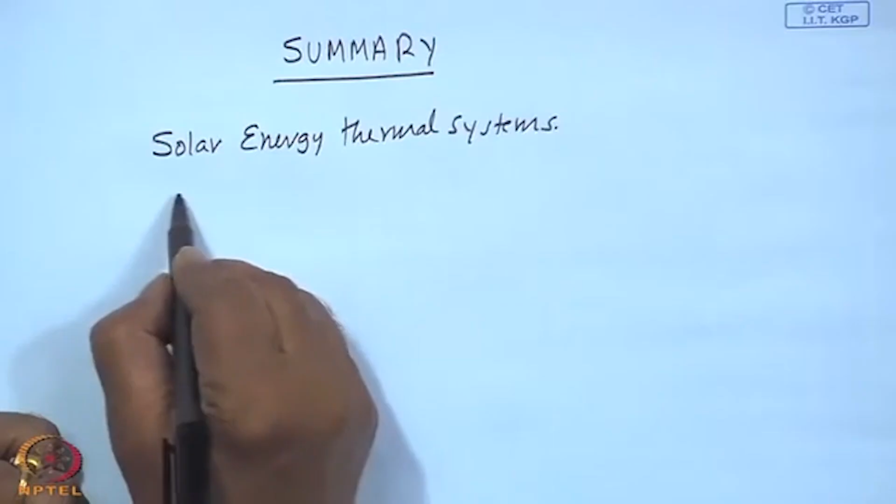So, we have covered quite a number of topics. I thought I shall take this opportunity to give my last or concluding talk, which will summarize what we have done in these about 40 lectures. Firstly, the limitation is we have considered only solar energy thermal systems, and in that we tried to give emphasis more to the principles rather than a particular system.

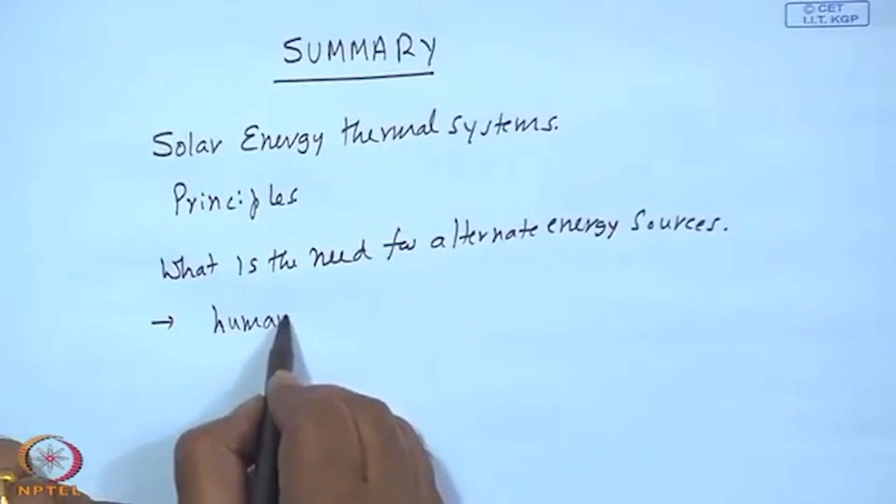And the basis for that is we try to establish what is the need in general for alternate energy sources, from which we have said that human dependence on external sources, these external sources being limited and being depleted at a faster and faster rate, people started having a look at alternate sources of energy, out of which solar appears to be a promising option. This is sort of our introduction.

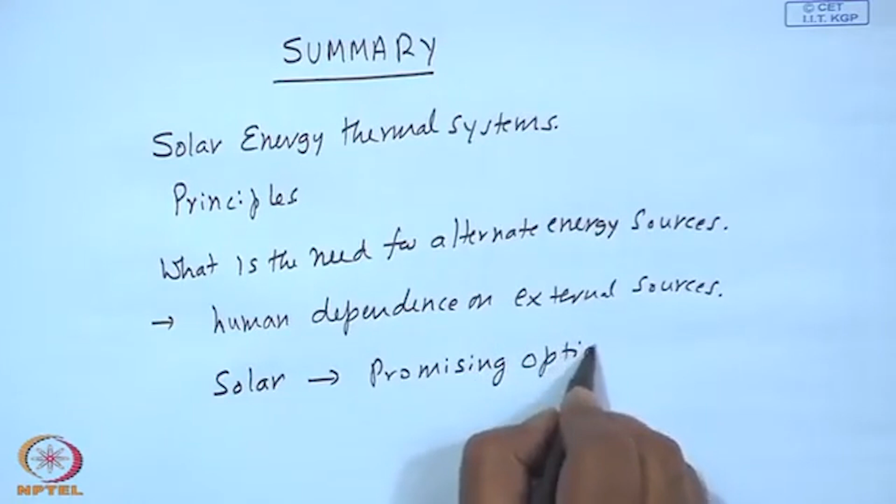So, we have gone through a lot of mathematics, and then we defined GON, that is the solar radiation on a surface normal to the sun's rays under extraterrestrial conditions on a given day, which is in terms of the solar constant GSC, which is if the surface is normal to the sun's rays under extraterrestrial conditions at mean sun-earth distance. So, that is how the solar constant is defined, and these estimates are of course varying.

It could be 1353 watts per meter square, even 1367 watts per meter square. As we are getting more and more, or rather better satellite data, this is being revised. And then we said that Earth's declination delta is given by the equation 23.45 sine of 360 times (284 plus n) upon 365.

Of course, I am not going to rewrite all these equations, so more exposure will be given to each frame. Everything is in standard time as far as we are concerned, and calculations shall be done in terms of solar time, which is given in terms of the standard time plus 4 minutes per degree of the longitude of the location and the longitude based on which the time of the country is based: LST minus LOC, plus or minus E. E is the equation of time, which is again related to the day of the year by the equations E and B. So, that plus will be for the western and minus for the east longitudes.

Generally, we try to define a number of angles wherein you have got a surface inclined at an angle of beta. Then this is the north-south axis or north-south direction, and this is the west-east, and it is not in general in line with north-south. So, there may be an azimuthal angle of gamma, it looks like r, but gamma is the location or notation we have been using. Zenith is nothing but the vertical to the horizontal, which makes an angle theta z with respect to the sun's ray, and with respect to the outer normal to the surface, the sun's ray will make an angle of incidence of theta.

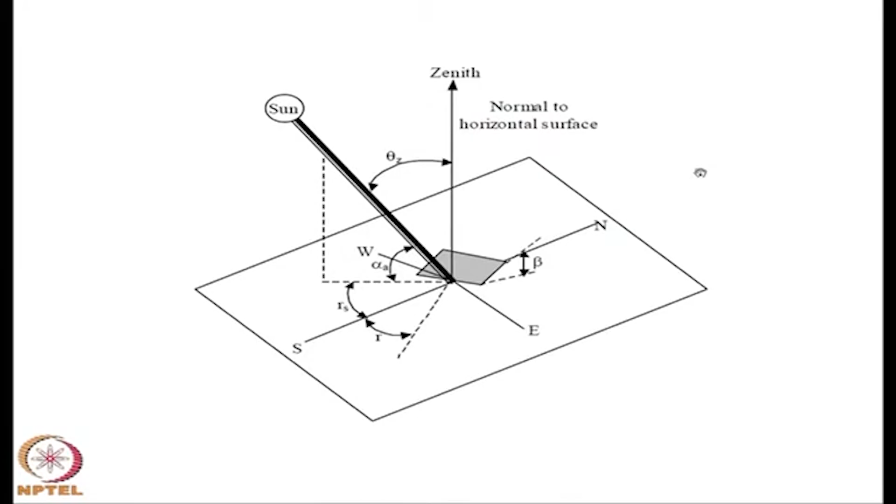So, that theta is in general a function of the latitude, slope, and of course the time omega and the azimuthal angle gamma, which is a long relation that can be put in a shorter form as cosine theta equal to A plus B cos omega plus C sin omega, where A is one expression, B is another expression, and C is cos delta sin beta sin gamma.

And if the surface is horizontal, the angle of incidence is also called the zenith angle. It will be a simpler expression, which you can obtain by putting beta equal to 0, as simply cos phi cos delta cos omega plus sin phi sin delta. Now, you will find this cos theta z to be independent of gamma, because if you have a horizontal surface, the projection of the outer normal will be a point, and you cannot define an azimuthal angle. And very rightly, the equation reduces to be independent of the azimuthal angle.

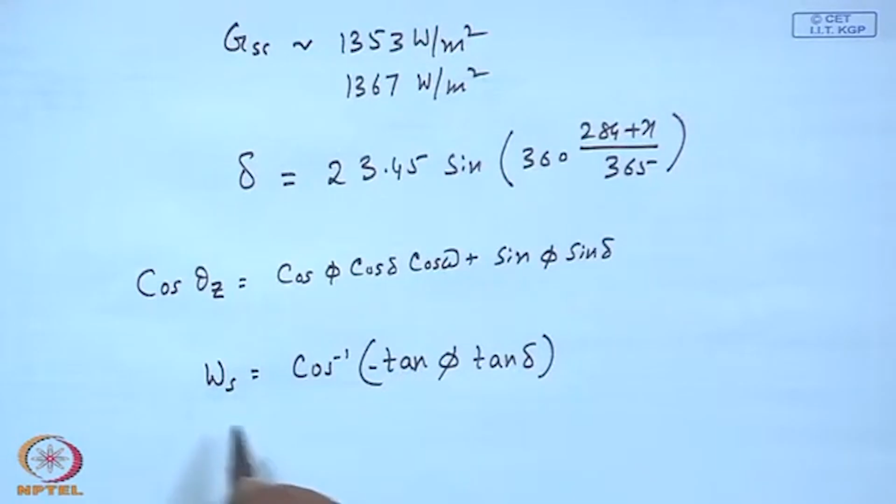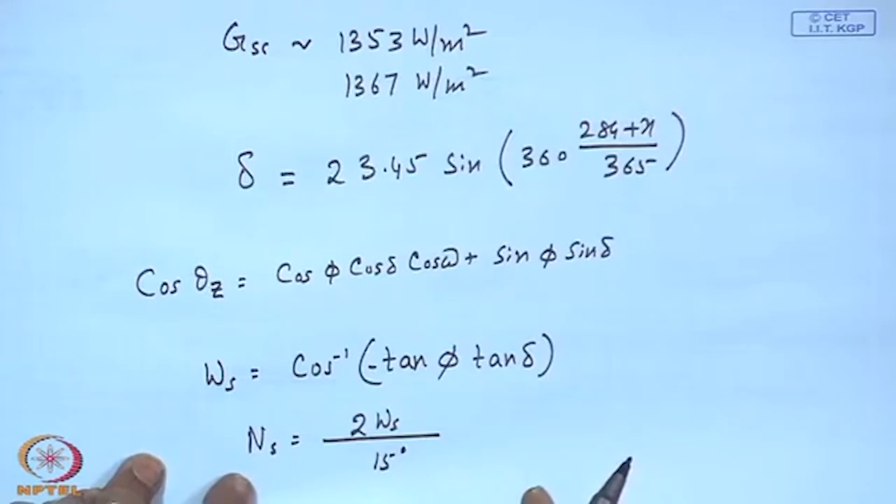Then we defined omega s, the so-called sunset hour angle, which is cosine inverse of minus tan phi tan delta, and this is the physical time that the sun will be appearing. The number of sunshine hours will be twice omega s by 15, because it takes 24 hours for the earth to rotate, so 15 degrees per hour. So, twice of omega s by 15 will be the number of hours that the sun will be above the horizon. Of course, this gives some problems if...

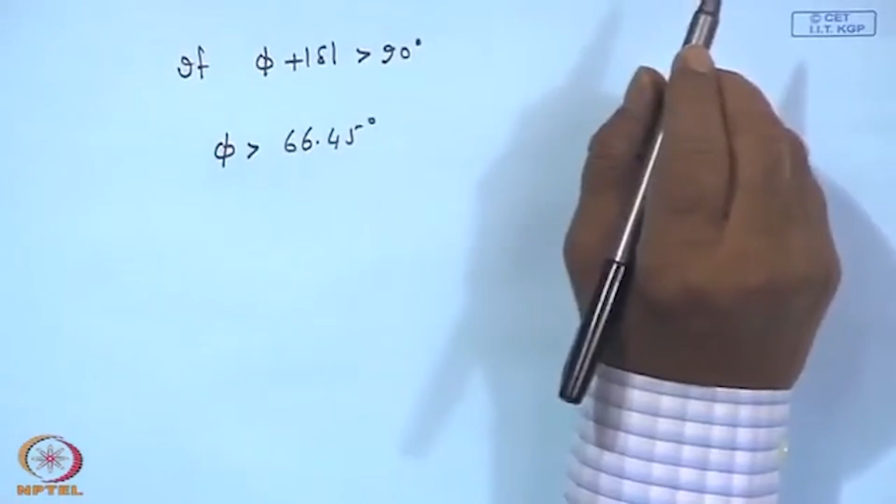...phi plus modulus of delta is greater than 90, it will go to a cos inverse of a negative number smaller than minus 1 or a positive number greater than plus 1, for which cosine inverse is not defined. This typically happens if phi is greater than 66.55 degrees, because maximum of delta is 23.45. So, anywhere beyond this latitude, you may have 24 hours of no sunshine at all, or all 24 hours with the sun above the horizon.

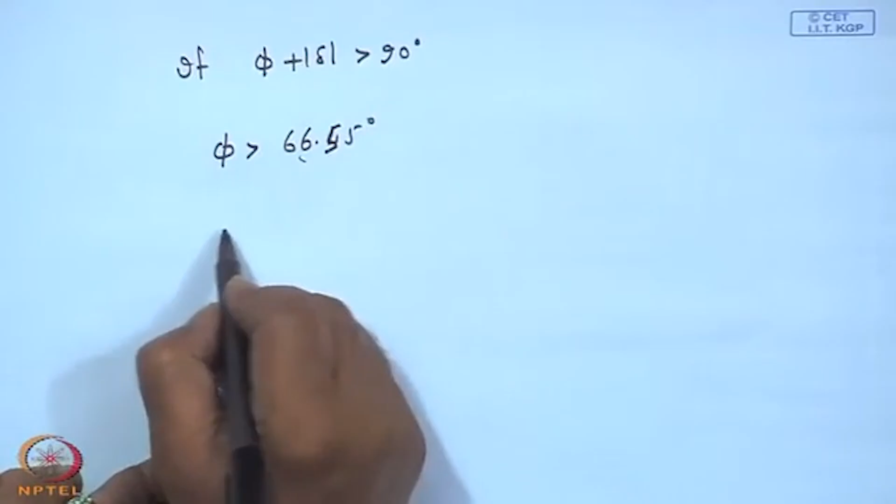So that is how we have dealt in detail with this sort of situation. From GON on the horizontal surface, it is GON cos theta z, and over a period of time, like 1 hour from T1 to T2, that is designated by I0, which will be G0 dt.

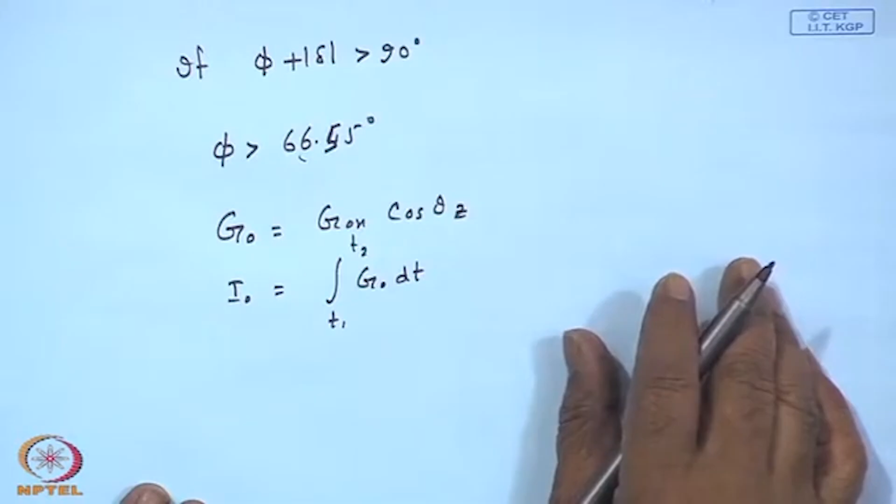When you integrate it, GON is equal to GSC into 1 plus 0.033 cos 360 n by 365, multiplied by cosine theta z, you will have an expression for your I0. For the day, you integrate from minus omega s to plus omega s, or twice 0 to omega s, giving a similar expression, except these hourly values of omega 1 to omega 2 are replaced with omega s. It becomes twice omega s, that is why this 12 becomes this particular 24.

Of course, the Angstrom type of relation is H upon H0 equals A plus B times number of bright sunshine hours by the possible sunshine hours. This A and B are location or climate dependent.

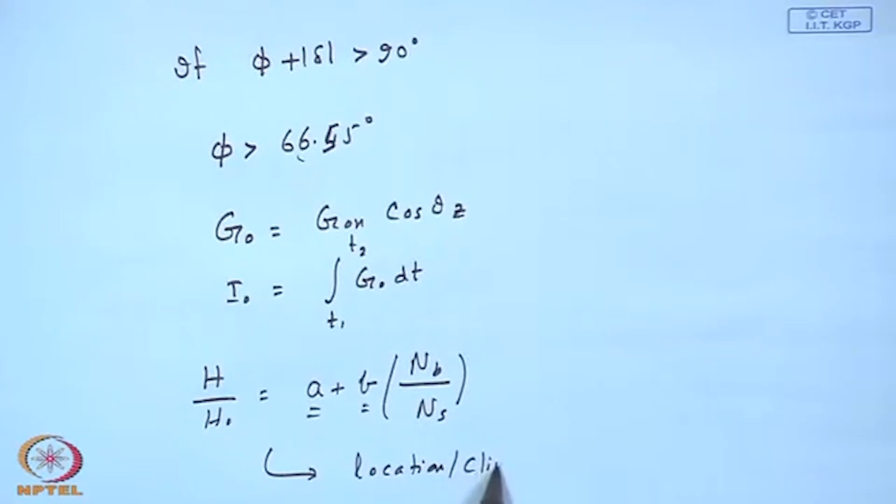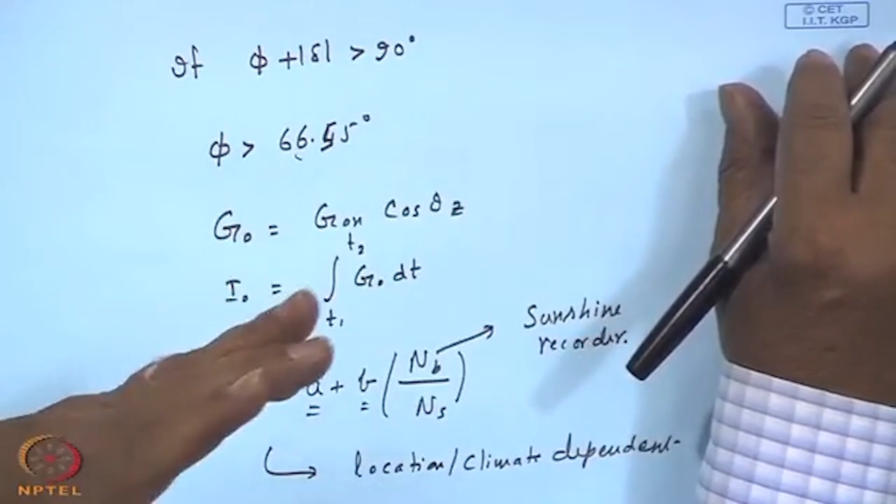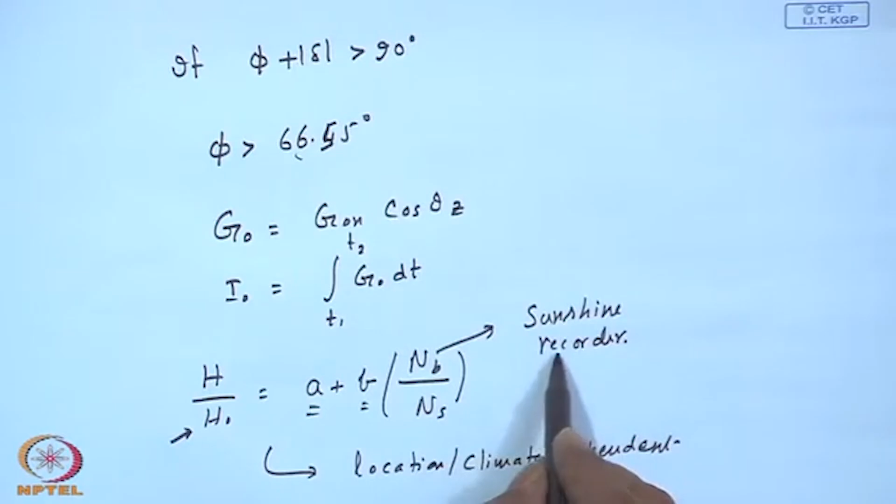This is measured with a sunshine recorder. So you get a strip that gets burnt, giving NB, the bright sunshine hours, upon NS, the possible sunshine hours for the location for the particular day. You can correlate this with the extraterrestrial radiation H0, which is calculable analytically, to the solar radiation on the Earth's surface. It is a crude approximate relation, but nevertheless the sunshine recorder has the ability to record and give you NB without external power.

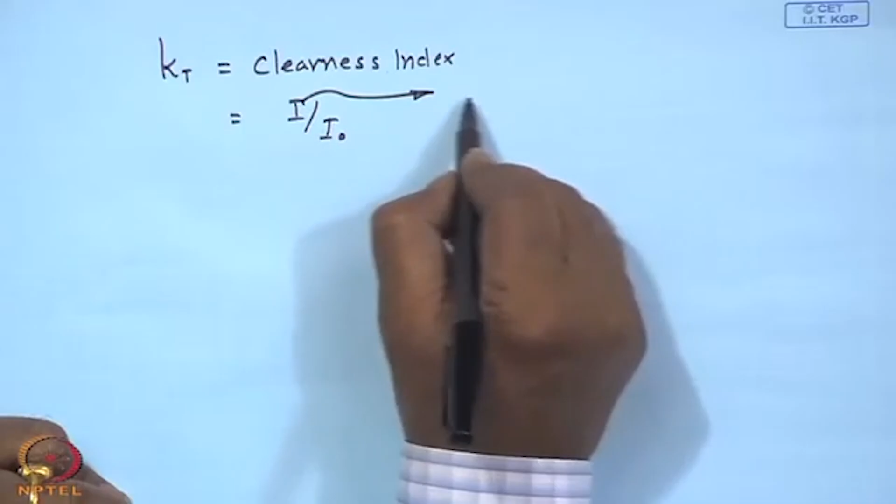So then we have gone through a large number of correlations. The essential and key ingredient for that is the clearness index, KT. On an hourly time scale, it is I by I0. I is the component measured on the terrestrial surface, which consists of direct radiation plus diffuse radiation. Or you can base it on the day, which is H upon H0, or KT bar, the monthly average daily value, H bar upon H0 bar. This H0 bar is calculated with delta equal to delta m, where the recommended mean declination values are given in the books, or in case you do not remember or are not supplied, you can use the midday of the month for calculating delta mean.

So you have got first of all ID by I, a function of clearness index due to Orgill and Hollands.

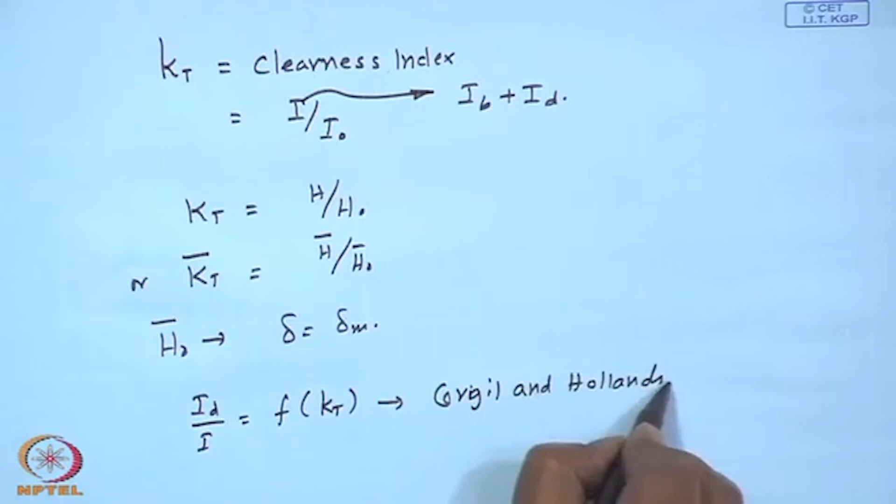Now you might be wondering, what is the purpose of these things? Why should we have this relation when we have ID and I? Most of the time the measurements are...

...and ID almost never for IB. The direct radiation, if you want to measure, you should align it with the direction of the sun's rays and have a tracking mechanism, and any small error in the tracking is likely to lead to a larger error. So what is normally done is measure the global or total radiation and the diffuse radiation, which can be obtained by shading the direct radiation part of it. If this is available, then my correlation for ID by I as a function of the clearness index KT will help me obtain...

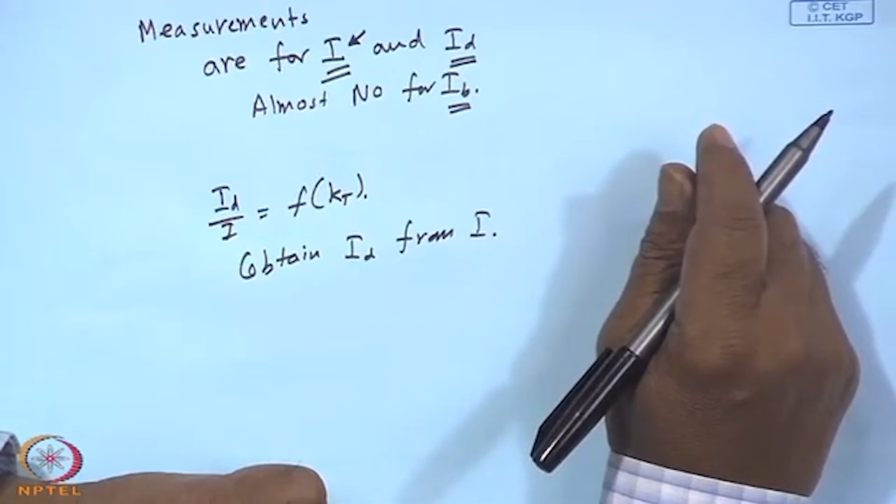...ID from I. So you can generate the diffuse radiation component from the global radiation if you have a correlation, and apparently the Orgill and Hollands correlation in terms of the hourly clearness index is reasonably good, though there are improvements over this which express ID by I as a function of KT and maybe theta z at that particular hour. So people try to distinguish the path that the sun's rays will travel through, this angle of incidence, which will depend upon the season and the location.

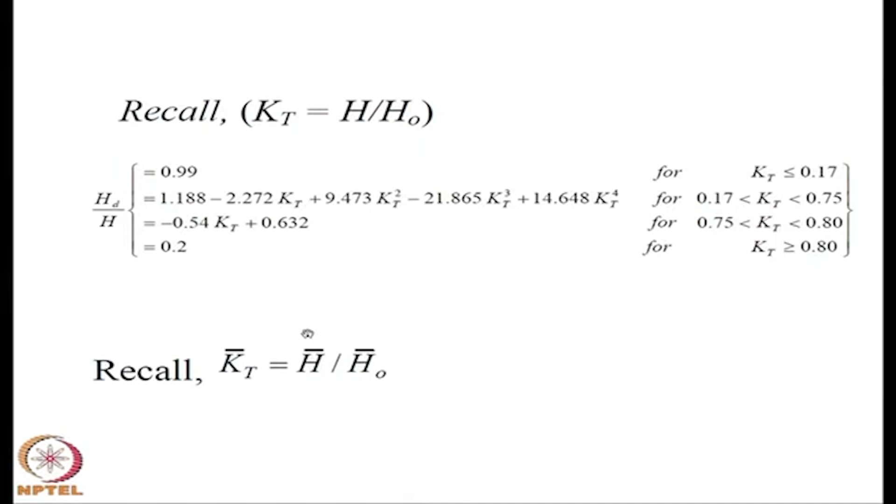So Collares-Pereira and Rabl, they have given the relation for the daily diffuse fraction and the monthly average daily diffuse fraction, HD by H and HD bar by H bar. So these relations I have shown, HD by H, and then the next one is HD bar by H bar, which is a function of clearness index for the month, Kt bar. And then the detail of radiation...

So these correlations, one should understand that they are developed for when you do not have detailed data, to generate some data which tries to mimic, at least within reasonable error limits, the actual data, or it may be extremely convenient to implement computationally.

So your RD, first due to ID by HD, Liu and Jordan. It is nothing but ID by HD given in terms of this relation, pi by 24 times cos omega minus cos omega s into this much. And by the way, this is also identically equal to I0 by H0.

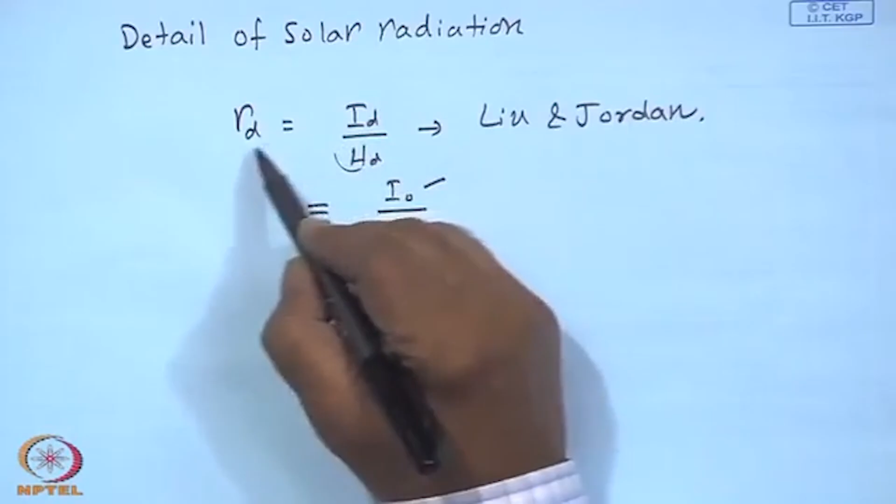If you take the extraterrestrial radiation and the corresponding daily extraterrestrial radiation, that will turn out to be the same relation. Though it is a surprising thing how the extraterrestrial radiation, which comprises purely direct radiation, is so well correlated to the diffuse radiation, and not to the direct radiation. Nobody talks about something like RB equal to IB by HB, it does not exist.

Maybe because the measurements are limited, that could be a reason.

RT similarly is I by H developed by Collares-Pereira and Rabl.

This is in addition to the same term of ID by HD, you have got in terms of pi by 24 times A plus B cos omega times cos omega minus cos omega s, upon sin omega s minus 2 pi omega s by 360 cos omega s, and you should remember omega s is in degrees.

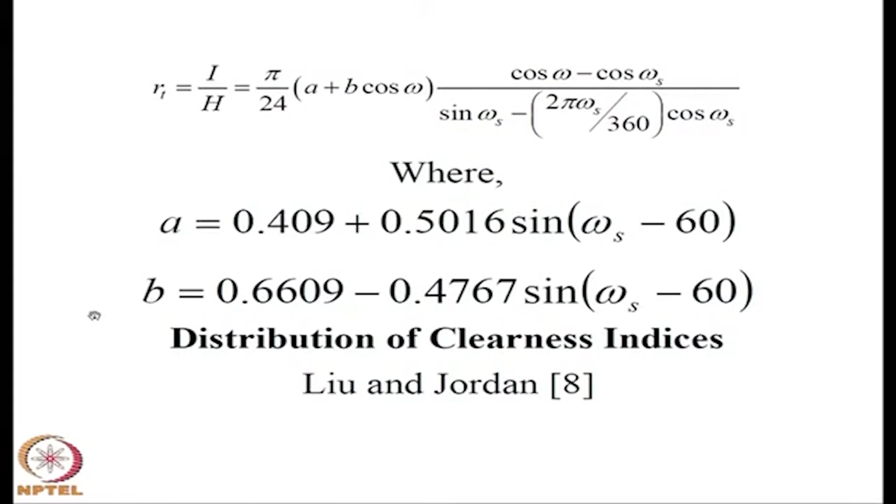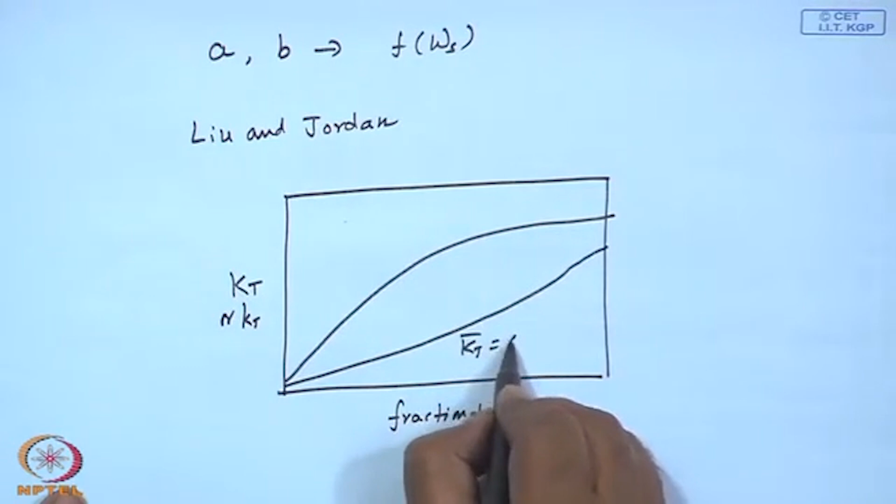Then, like any statistical distribution, Liu and Jordan give a cumulative frequency or fractional time versus Kt, daily or hourly, small kt. This is for Kt bar equal to 0.3, this may be for Kt bar equal to 0.7, this may be approximately 1, and this is 0.

So what basically it means is, if you take a month for example, there are 31 days or 30 days, so you have daily clearness indices KT1, 2, up to KT31.

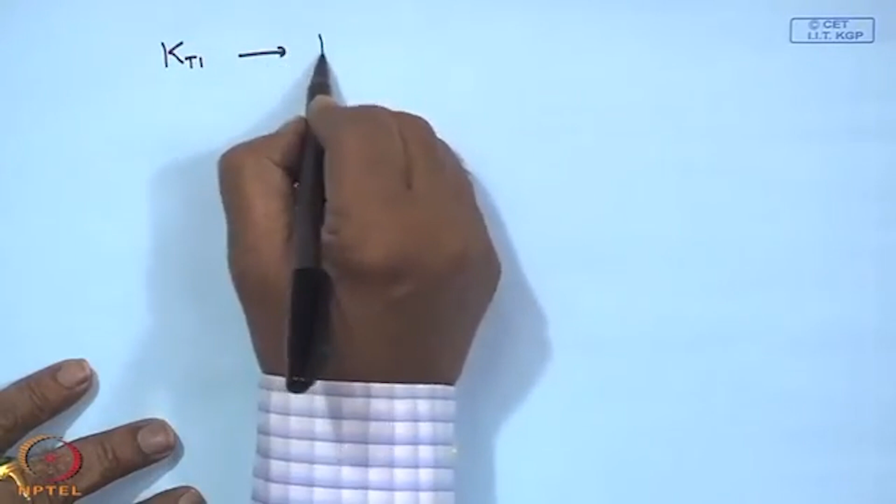It is not necessarily the first day of the month is the lowest, but there are 31 values, out of which I have changes from KT minimum to some KT maximum.

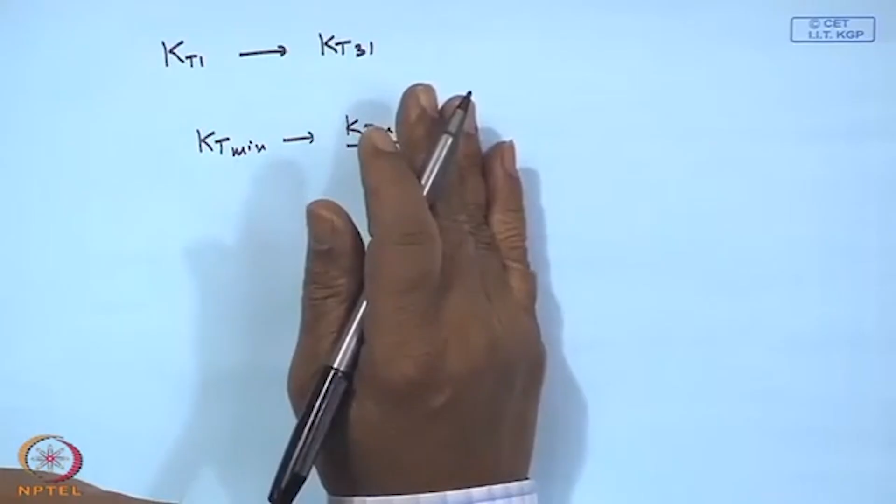The cumulative frequency can be defined as the fractional time or the number of days below which a particular value of clearness index occurs. For example, if KT max is there, all the days will have a clearness index less than KT max, and if KT minimum is there, there are no days with KT less than KT minimum. That corresponds to fractional time being 0, and this corresponds to fractional time being 1.

It is something like your marks in the class, if there are 100 students or so, and less than 10% there may be 20 fellows, and less than 30% there may be another 10% fellows, and less than 90% everybody may be there.

So if you plot that, it gives you the so-called cumulative frequency or fractional time distribution. These curves are developed with North American locations, and they are more or less acceptable for quite a few climates, although there have been a number of reports which show that they do not work for such and such a climate.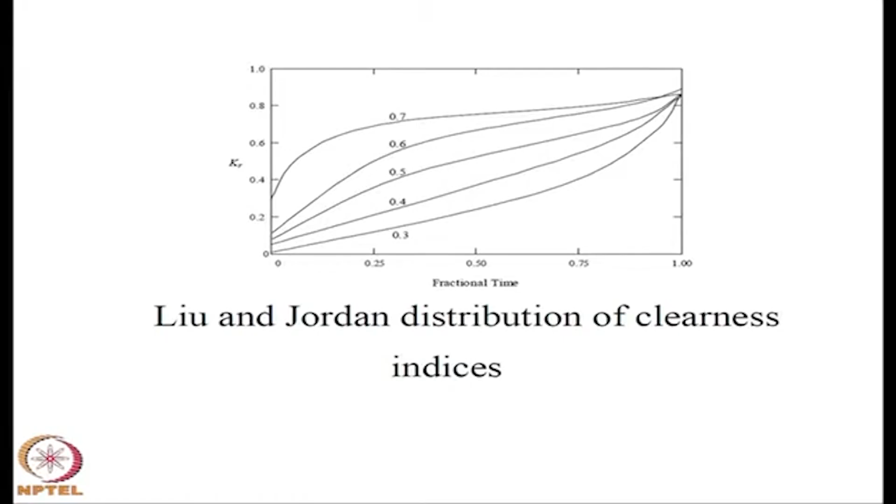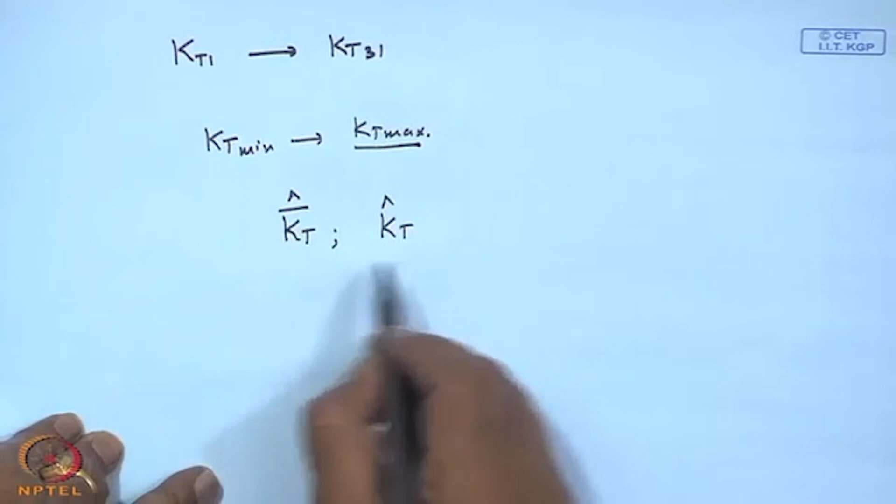In our own investigation, we used a KT bar cap and a KT cap, which will be defined as KT minus KT minimum by KT max minus KT minimum. Similarly, KT bar cap will be KT bar minus KT minimum upon KT max minus KT minimum.

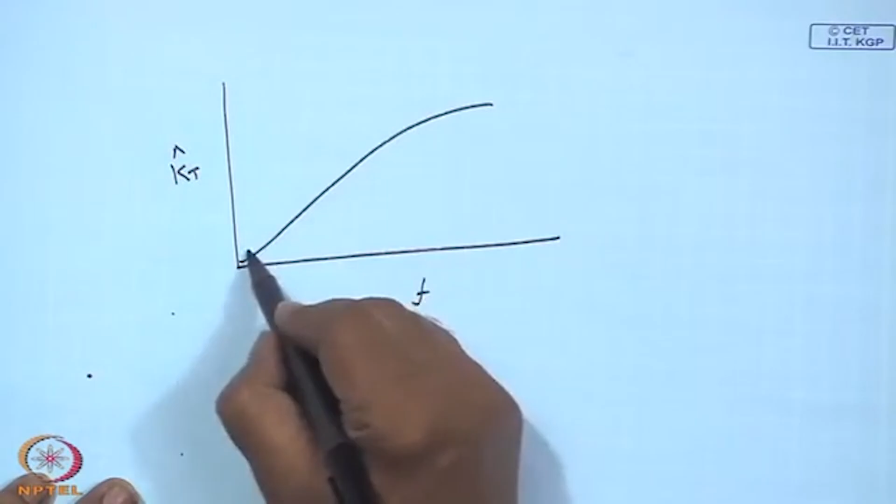So the x-axis remains the same, fractional time f, and you have got KT cap over here, and the functions look similar - this is KT bar cap. So what we try to bring in here is by putting that KT minimum and KT maximum in defining these modified variables, you are taking into account location specific characteristics.

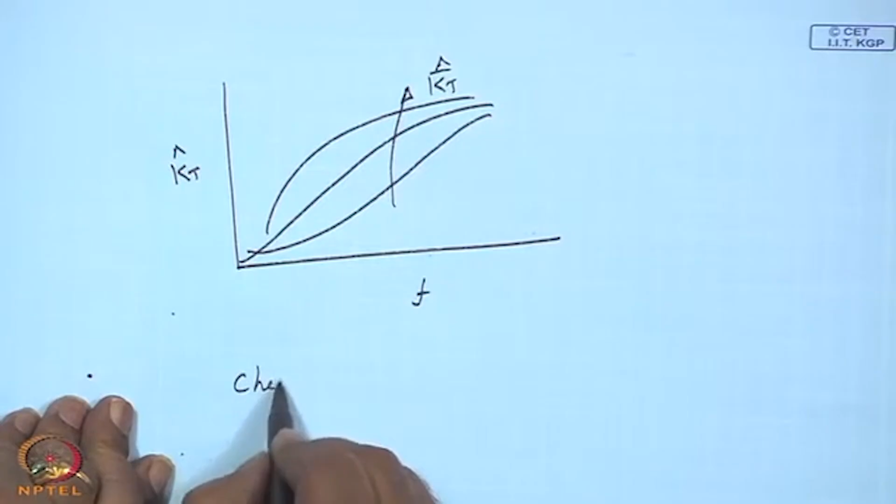For example, if you have Chennai, and the average clearness index is let us say 0.72 in summer, KT min may be 0.69, KT max may be just 0.74. Against that, for example, you have Srinagar, assuming KT bar in some month is 0.72, this may have a KT min of 0.33 and KT max of 0.78 on one particular day.

So you have a large swing if the location is different compared to a low latitude location like Chennai. This will be taken care of in this type of plot, whereas Liu and Jordan's approach will not in general accommodate the varying low and varying high clearness indices for a given average.

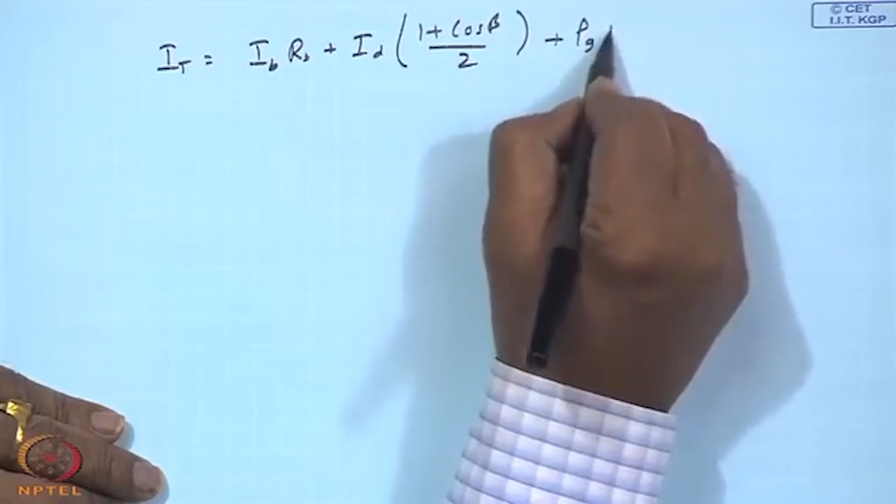So we try to express the solar radiation on a tilted surface as consisting of the direct radiation plus the sky diffuse radiation plus the ground reflected radiation. And of course, overall factor R, if It is equal to R into I, can be rewritten as 1 minus Id by I. Though it is a simple relation, I chose to show this in the summary with a specific idea which follows.

You should see that everything is written in terms of Id by I, which are correlated to clearness index. So if you have a measurement of only I, then the use of the correlation of Id by I or Hd by H is very much understood.

Then this Rb is cos theta by cos theta z, where cos theta is a plus b cos omega plus c sin omega, as we have already explained, and a, b, c are given. Rb for a south facing surface is simple: Rb equal to cos(phi minus beta) cos delta cos omega plus sin(phi minus beta) sin delta, by cos theta z, which is cos phi cos delta cos omega plus sin phi sin delta.

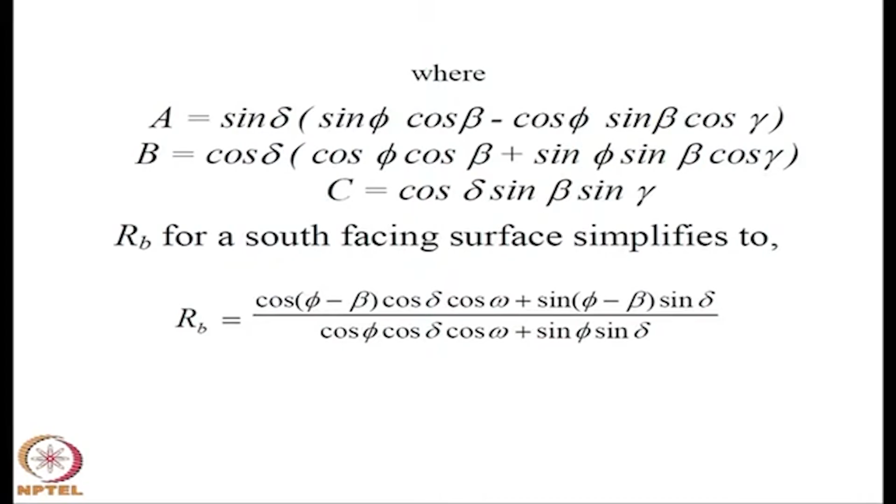So, these relations I am giving again and again, so that you should become familiar and not be afraid to look at long expressions. There is a logic, the way we write it, the way we develop it, and if you pick up that, you shall be able to remember also. Though it is not necessary you should have them by heart, but you should be able to know the functions of it.

From a solar energy collector, useful energy gain is expressed in terms of the area, the optical efficiency or the transmittance-absorptance product, the radiation falling at the collector minus the losses evaluated between mean plate temperature and the ambient temperature.

Ultimately, this has been rewritten in terms of the collector efficiency factor minus the losses evaluated from the mean fluid temperature, or in terms of the heat removal factor: tau alpha times I_t minus U_L into T_fi minus T_a.

So, by putting everything in terms of F_r, I am able to have a single point temperature, so that there is no possibility of a misinterpretation or misunderstanding or miscalculation of T_fm or T_pm.

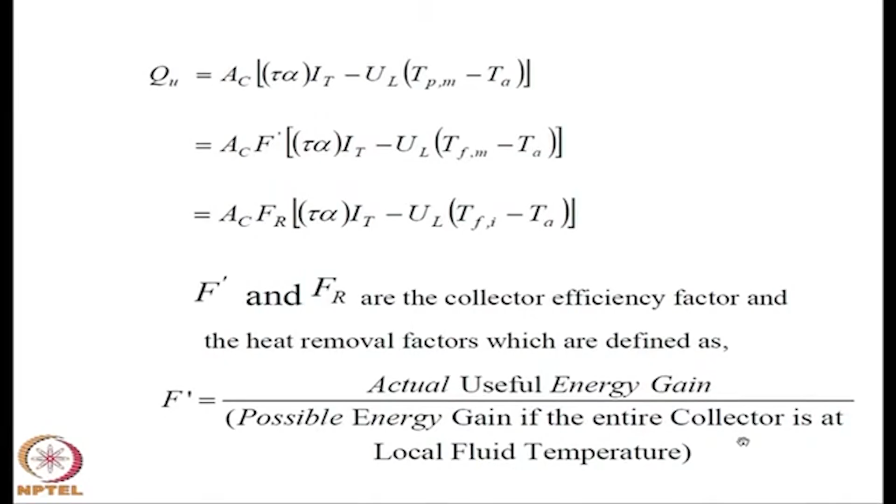So, you have F dash, the collector efficiency factor, mind you it is not the collector efficiency, and F_r is the heat removal factor, which have been defined in terms of the actual useful energy gain to the possible energy gain if the entire collector is at local fluid temperature, that is F dash. And your heat removal factor F_r is the actual useful energy gain by possible energy gain if the entire collector is at the fluid inlet temperature.

In other words, the losses cannot be lower than that corresponding to the inlet temperature, and if anybody gives a higher value than that, you can find out that the measurements have not been right. And U_L is the collector overall loss coefficient, which needs to be calculated iteratively.

You assume a plate temperature T_p and then guess a cover temperature, calculate the losses, and those losses should be equal to whatever is lost from the glass cover also. So, you can alternately calculate the overall loss coefficient by first estimating the top loss coefficient U_t, a long expression.

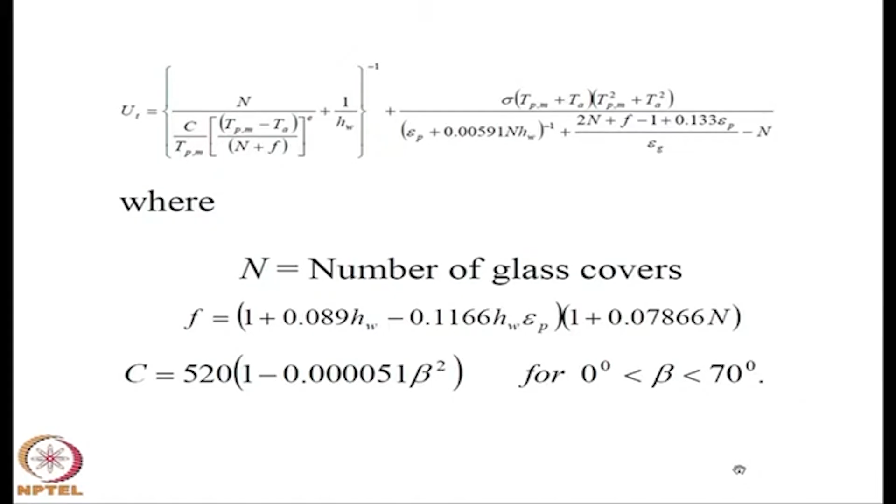This has been correlated by Klein in terms of the number of glass covers, the wind heat transfer coefficient, emissivity of the plate, emissivity of the glass, mean plate temperature, ambient temperature, and of course the Stefan-Boltzmann constant, where this f and c are again in terms of other quantities like beta, the slope, and everything is explained here.

So this can be readily used, and then you can calculate U_L as U_t plus U_b, the back loss coefficient, which is nothing but the inverse resistance of the conduction or the insulation kept at the bottom of the absorber plate.

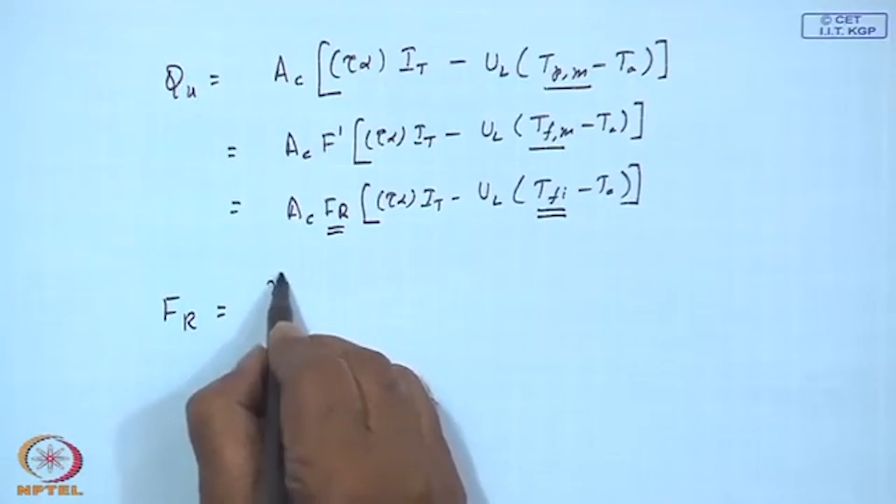So, if you go through a little bit of algebra, we got a simple expression for the heat removal factor, which I will give you in a minute: m-dot Cp by A_c U_L times 1 minus exponential of minus A_c U_L F dash by m-dot Cp. So, if you look at this equation, my independent parameters are F_r tau alpha and F_r U_L.

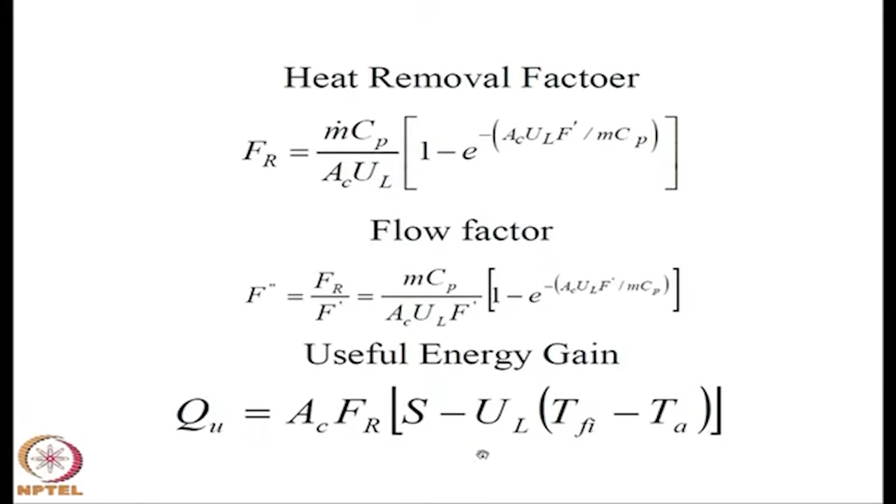So, we know how to calculate U_L, we know now how to calculate F_r, and tau alpha will be calculated later on, so that your Q_u, the useful energy gain, is A_c F_r times S minus U_L into T_fi minus T_a. So that tau alpha, yes, we were talking about it, and well, it appears here.

So, if S is the absorbed energy over a period of 1 hour, let us say, that should be equal to I_T into tau alpha, which is tau alpha into I into R.

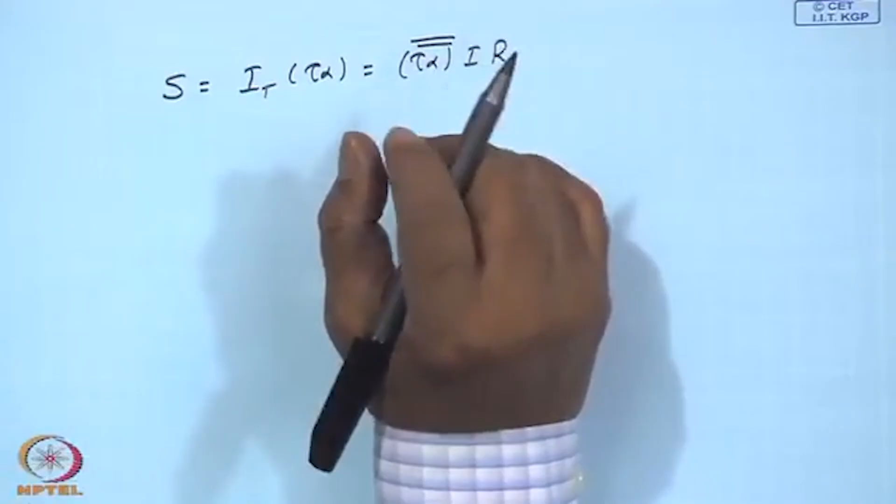Now, what we find is that this tau alpha comprises of the direct radiation component plus the diffuse radiation and the ground reflected radiation. We will come to it a little later, and in the same context we define a critical radiation level, which has become very essential in calculating the utilizability.

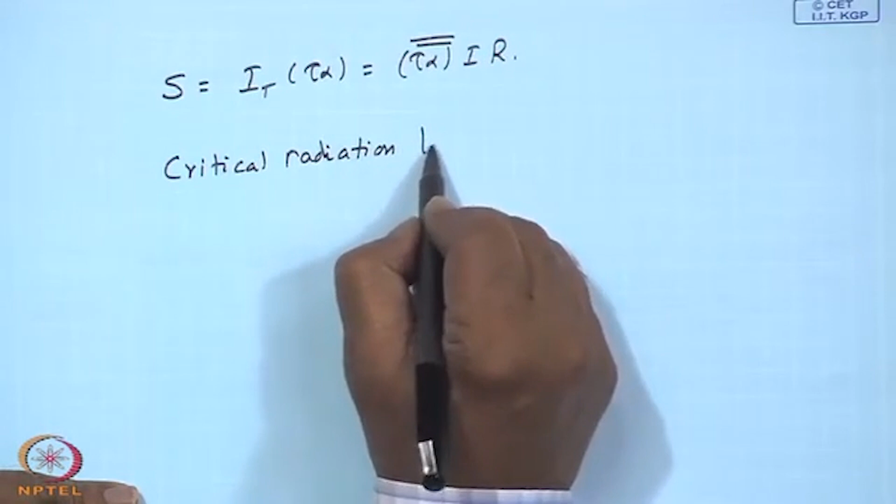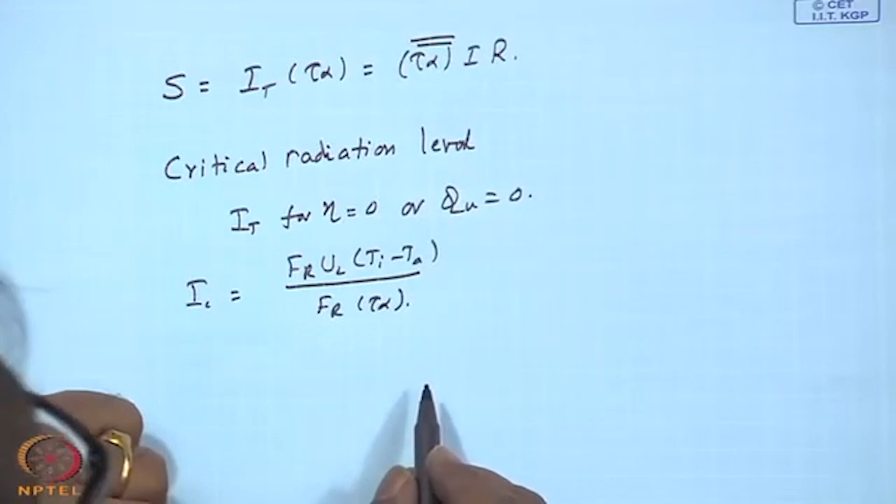Which is basically, you can say that I_T for efficiency is equal to 0, or Q_u is equal to 0, which by equating the Q_u expression you will get F_r U_L into T_i minus T_a by F_r tau alpha. Once again, I should remind you that there should be a hidden time factor delta t, because U_L in watts, and I_T in general is kilojoules per meter squared hour according to our notation.

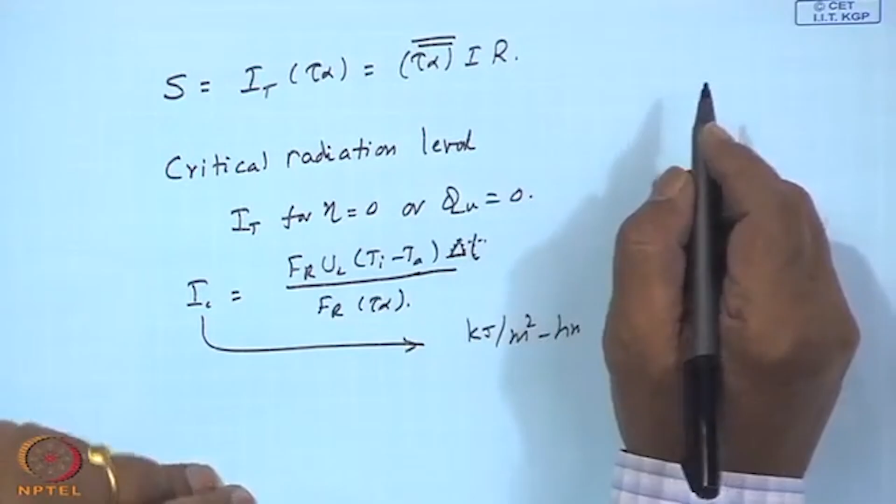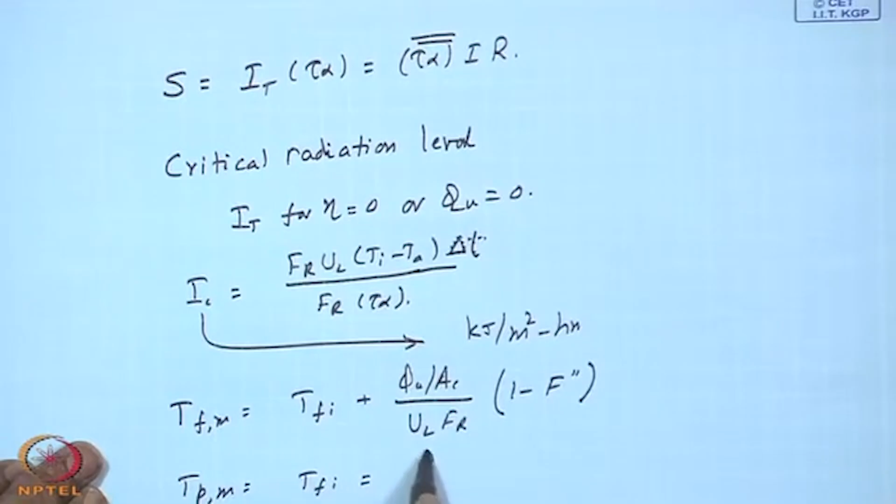And the plate temperature is T_fi plus the same thing, Q_u by A_c by U_L into F_r, times 1 minus F_r.

So, subsequently we have analyzed a number of other configurations, not just the fin and tube, but different arrangements for the liquid based as well as the air based collectors, and we tried to take into account the heat capacity effect.

With certain approximations, the temperature of the plate Tp varies with time as given by this equation.

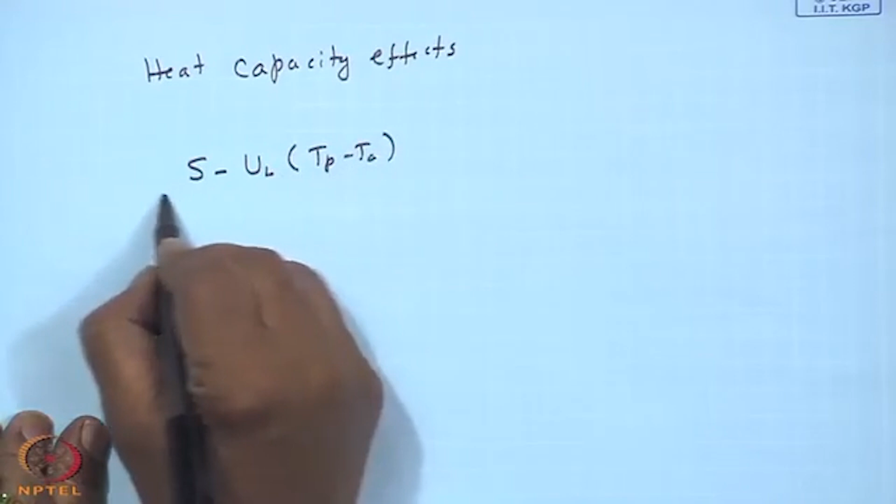If UL is the overall loss coefficient, Tpi is the initial temperature, and Ta is the ambient temperature, the relation is given by e to the power minus Ac UL times time by mCp effective.

And this mCp effective is mCp of the plate plus the sum over i of Ai mCp i, where i equals 1 to n.

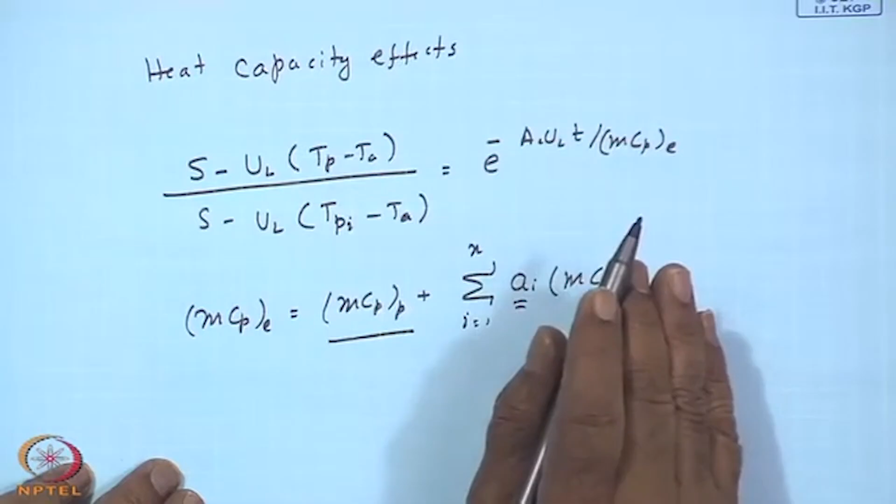If there are n number of glass covers, we try to convert that into an equivalent plate, so that mCp effective is the mCp of the plate plus a term involving the ratio of the overall loss coefficient from the cover under consideration to the ambient, to the overall loss coefficient. So Ai is Ui by UL.

Then for air heaters, pressure drop could be an issue. So we gave some formulae to calculate the pressure drop as if it is a duct, which is quite okay.

And then there are other geometries, the tube can be below the absorber or above the absorber, as shown here, in a fin and tube arrangement, which I call arrangement 2. Then of course the corresponding efficiency factor is given.

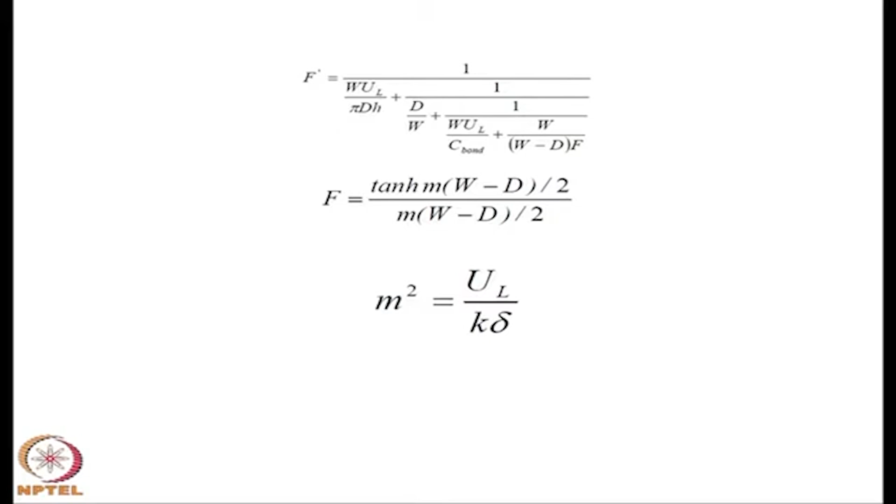There will be slight variation compared to what you have for the first configuration that we have studied.

So you have got f dashed. The very first configuration we studied was with the tubes below the absorber, and this one is above the absorber.

There are plus and minus points, because some people argue that this tube will be absorbing directly the solar radiation, but others argue that it can also directly lose by emission. Basically, it is a convenience of the manufacturing.

And you have got, of course, the classical halfway configuration.

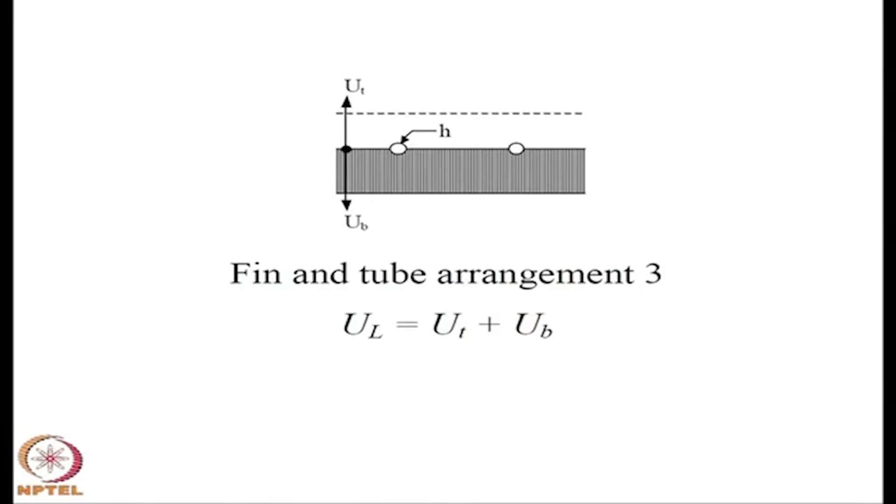So UL is always equal to the top plus the back loss coefficient in these arrangements. I have again given that there will be slight differences in the expression for f dashed, because of how much area it directly receives and does not. The fin efficiency is similar, tanh(mL) by mL, as you know from the equation, where L is W minus D by 2.

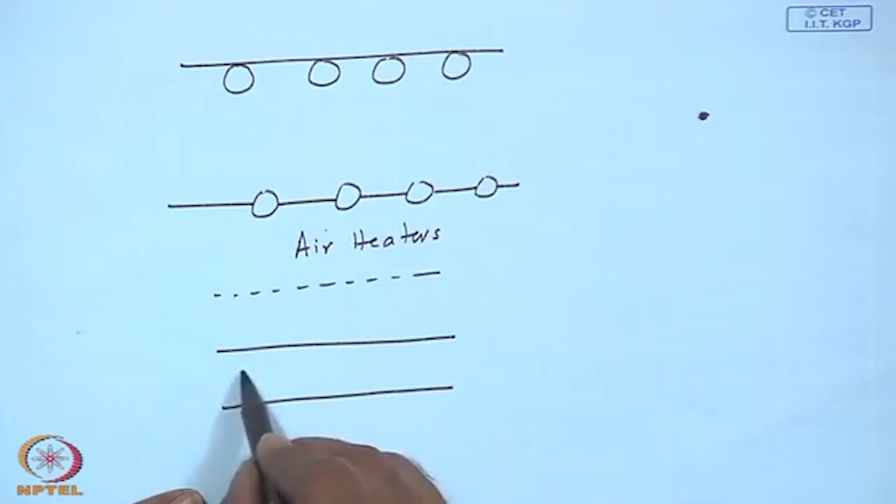So then we considered the air heaters. You can have a flow with an insulated glass cover. This is the absorber. The flow is between the absorber and the top glass cover.

Now the hot fluid is directly in contact with the glass, which loses energy to the ambient. Consequently, the so-called overall loss coefficient UL is not a complete loss, but actually some goes to the fluid too. And you have expressed UL such that if you put UB equal to 0, UL will not reduce to UT in this particular instance.

And there is the collector efficiency factor, then the radiative heat transfer coefficient. The next one is the regular duct.

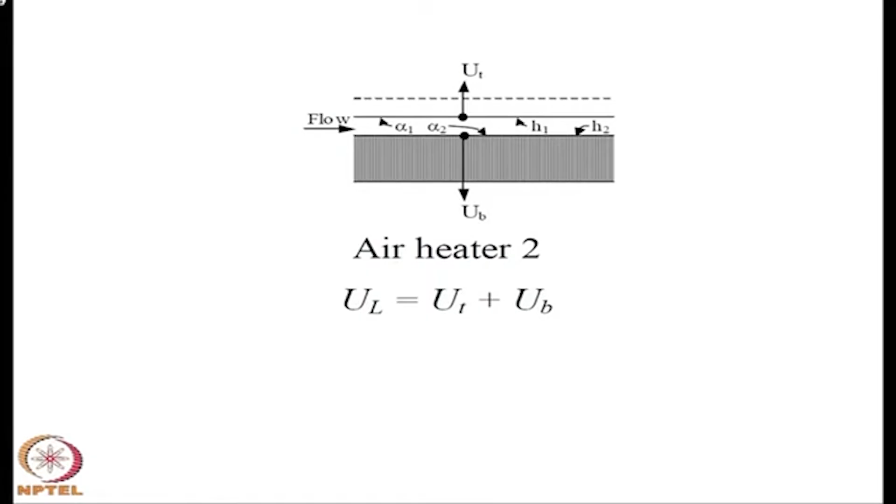You have the glass cover and the duct through which the flow passes, and of course you have insulation. So here UL is equal to UT plus UB. So there are no issues.

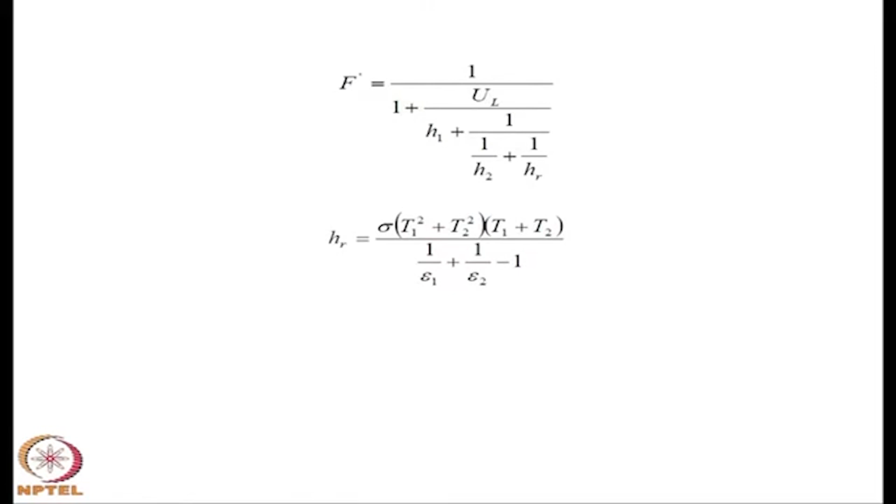So you have got an F dashed efficiency factor and the radiative heat transfer coefficient, and this is to have a heat transfer augmentation, particularly for air collectors.

People provide sort of corrugations or paths in between. This will break the boundary layer or mix the hot and cold fluids from the bottom and the top within the duct, thereby improving the heat transfer between the fluid and the absorber plate.

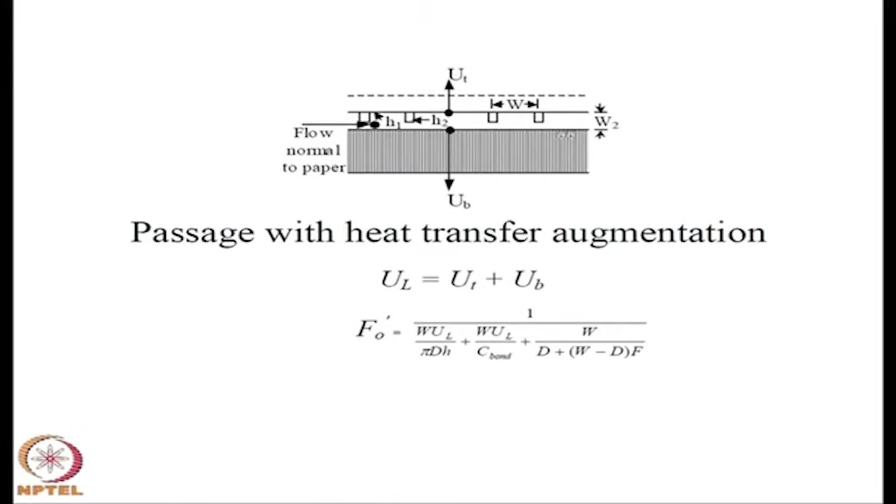So this is analyzed in terms of the spacing H1 and H2, which are the heat transfer coefficients, and the expressions are given here.

So now you can define the fin efficiency of the plate and the fin efficiency of the fin, because when I talk about these two, this is the fin efficiency of the plate, and if you take this as a fin, this is the fin efficiency of the fin.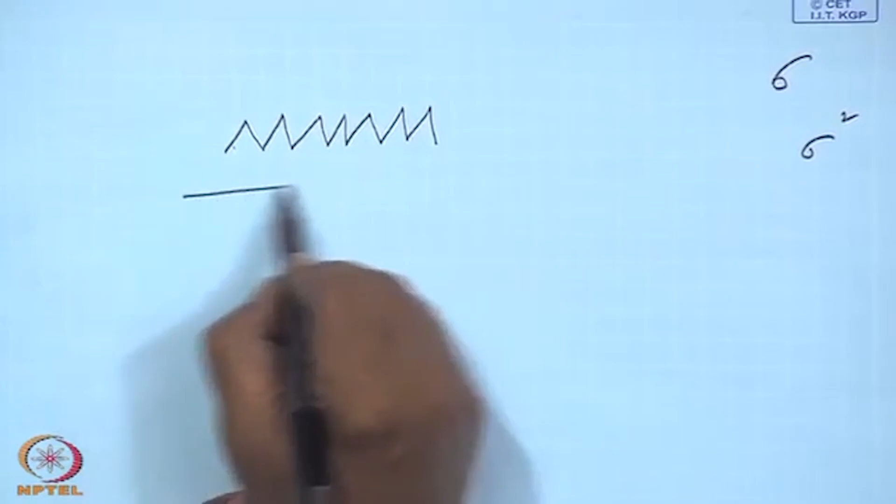Now, people try to improve the heat transfer characteristics, particularly for the air arrangement, by having the flow through a corrugated sheet. If you have a corrugated sheet like this, similar to the configurations we discussed, the flow can be below or through the top, with a glass cover. What this corrugated sheet does is effectively give higher absorptance, because there will be re-reflection between these two surfaces.

But higher absorption also brings higher emissivity, though at a lower temperature. Consequently, the gain may still be a little more than the loss, and it provides a much larger area for heat transfer, with boundary layers continuously broken by these corrugations. So here also, the fluid is not directly in contact with the heat-losing surface, so UL is equal to UT plus UB.

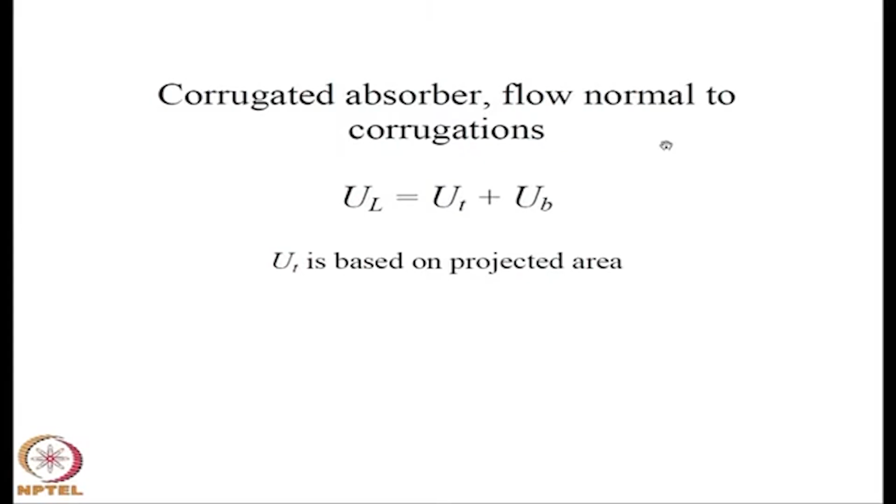So, this is inside the tube which we have done. Then F-dash, the collector efficiency factor, is given here. In the serpentine tube arrangement, the advantage is it has got fin efficiency, plus the entire fluid goes through the pipe, so heat transfer characteristics may be better, though there will be additional pressure drop.

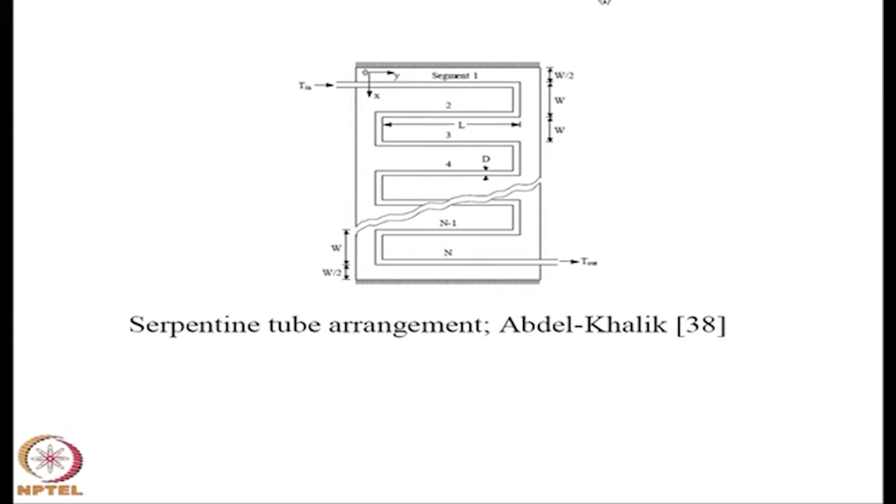This is done by Abdel-Khalik. These relations we have given in detail in the class notes from earlier lectures. This is once again a large surface area trying to mix the hot and cold fluids, a geometry due to Selkirk.

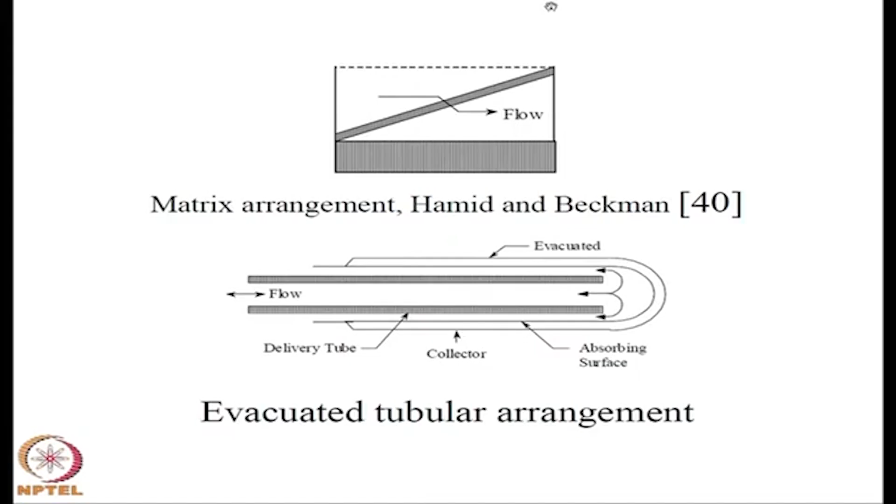Then a matrix arrangement has been suggested by Hamid and Beckman, and the advantage here is the flow goes through this matrix like a porous medium, having a large exposed area for heat transfer, though the pressure drop could be higher. This is what we were comparing with the evacuated tubular arrangement when considering the economics, the cost per tube of the evacuated tubular arrangement versus the flat plate collectors.

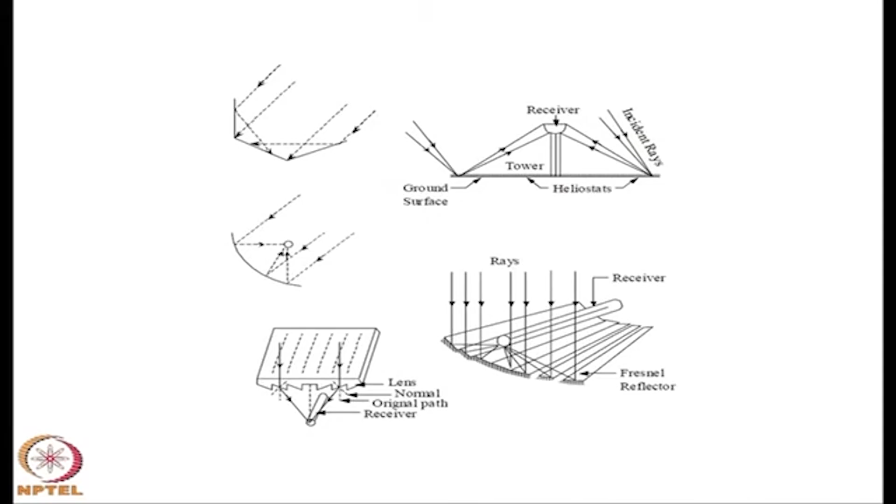So then we went through concentrating collectors. There are different concentration methods you may find here, some simple, rather like two boosters, and then you may have the central receiver concept, or a paraboloidal dish at the focal point being the receiver, and a Fresnel lens or a Fresnel reflector.

The necessary condition for concentrating collectors is they need to be tracked, in other words they should be pointing towards the sun. Perfect tracking is 2-axis. So if you have got a parabolic dish, and here is the sun, the outer normal is always in line with the sun's rays. That requires moving from east to west as well as swiveling around a north-south axis.

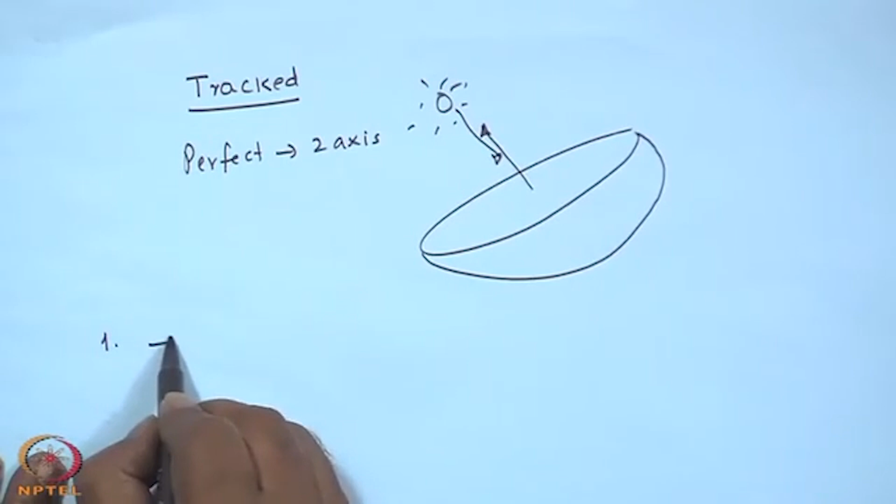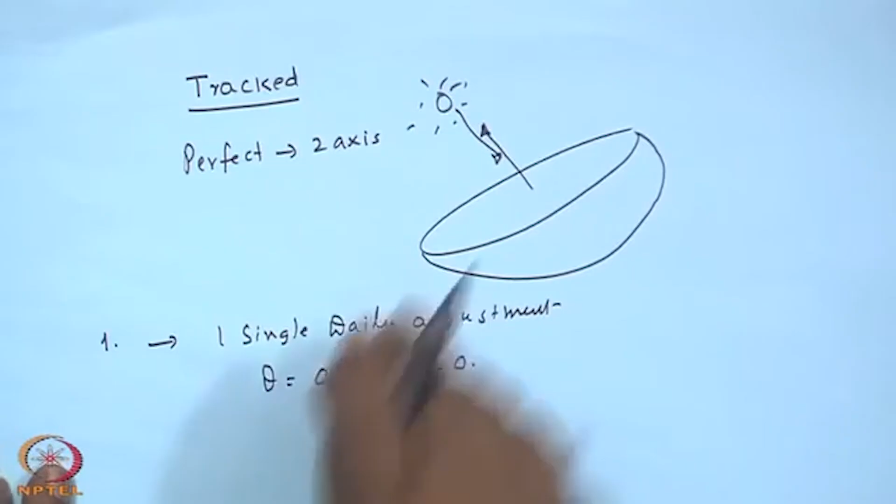Other simpler trackings could be the first mode, which is a single daily adjustment such that theta equals 0 at solar noon, omega equals 0. That gives a simpler expression: the condition phi minus beta should equal delta, and you get a simpler cosine theta expression. Essentially it is a flat plate turned towards south with beta changing from day to day depending upon phi minus beta equals delta.

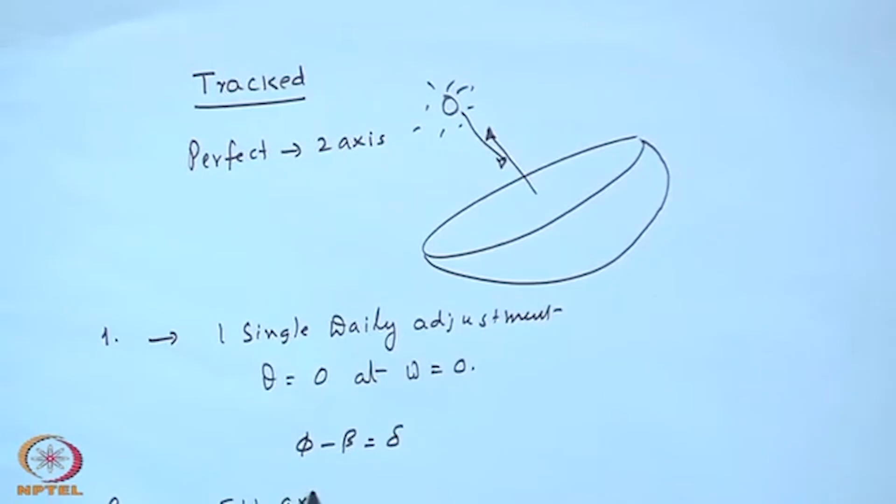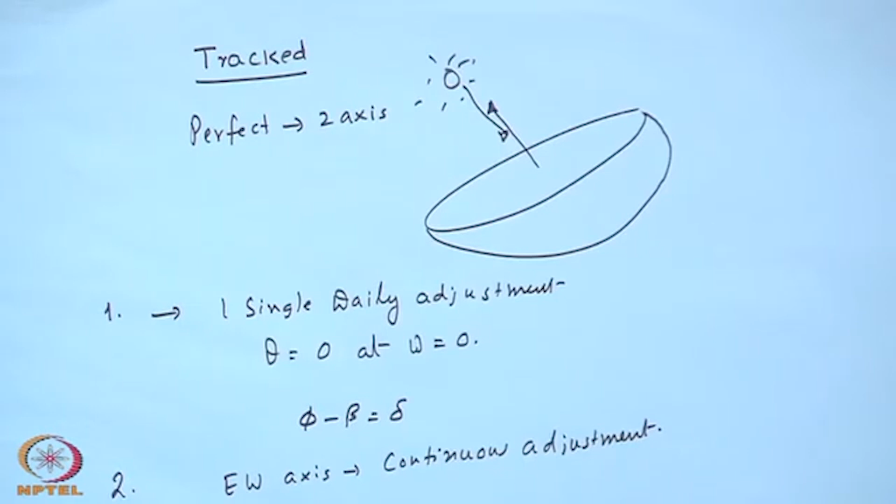Then this is the same thing, but I want to minimize at every instance, so beta will be changing continuously throughout the day, giving a cos theta expression - this is east-west axis with continuous adjustment. This requires continuous adjustment throughout the day, and you can derive the expression for beta, and the cosine theta expression is given here for this mode.

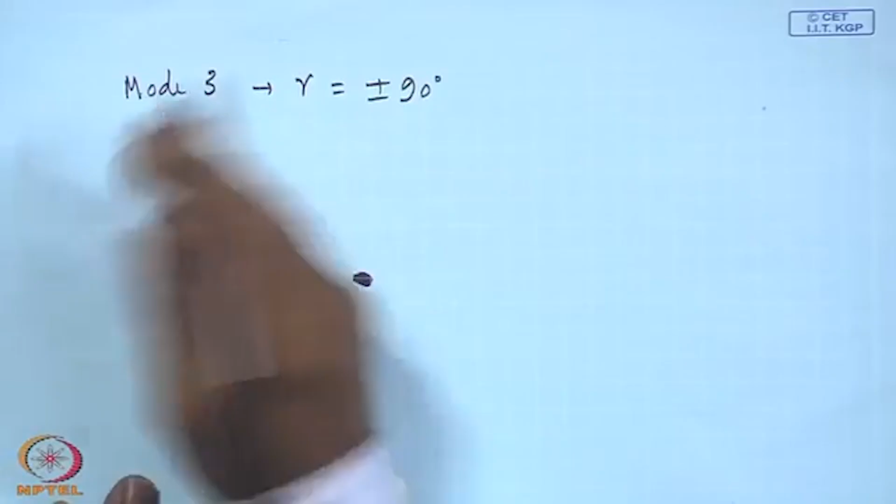Then you have got the third mode, a north-south horizontal axis, which gives cosine theta in this particular form - you can realize this for the third mode. In mode 3 you choose gamma equal to plus or minus 90 degrees depending on forenoon or afternoon, because as it rotates from east to west on the north-south axis, until noon it will be gamma minus 90, and after noon gamma will be plus 90.

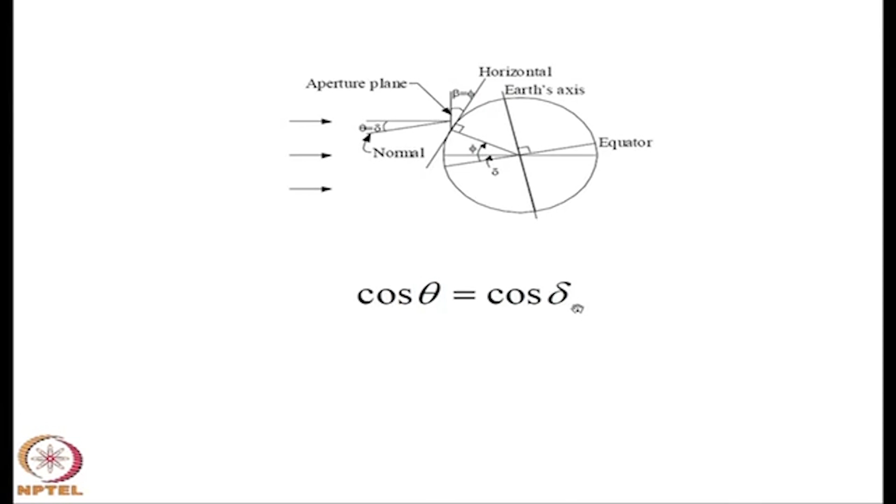Then you have the polar mount, where it is as if the collector is rotating along with the earth, and cos theta is simply cos delta, as shown in the figure. Depending upon the equator and the plane of rotation, which differ by angle delta, my cos theta will equal cos delta, which is pretty good compared to perfect tracking where cos theta equals 1, since delta maximum is only 23 degrees, giving almost 0.95. So with cos theta about 0.95 or higher compared to 1, there is not much loss in having only single-axis tracking compared to perfect 2-axis tracking.

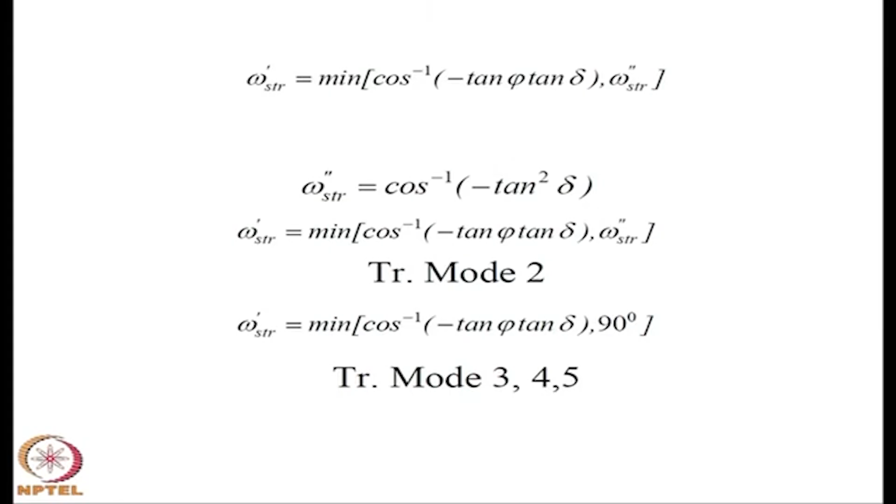So in all these cases we need to calculate the apparent sunrise and sunset hour angles for each mode - 1, 2, 3, 4, 5 are given. By setting theta equal to pi by 2, you will obtain those numbers.

So we shall continue with the remaining summary in the next class, and I shall go through the remaining relations so you will be confident, and these are all at one particular place for you to refer to. Once again, my offer is open - if you point out any mistakes, they will be corrected, and the correct answer will be communicated to you. Thank you.